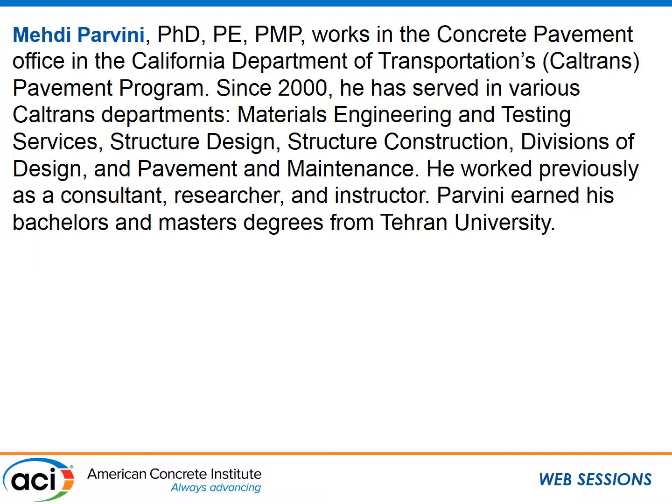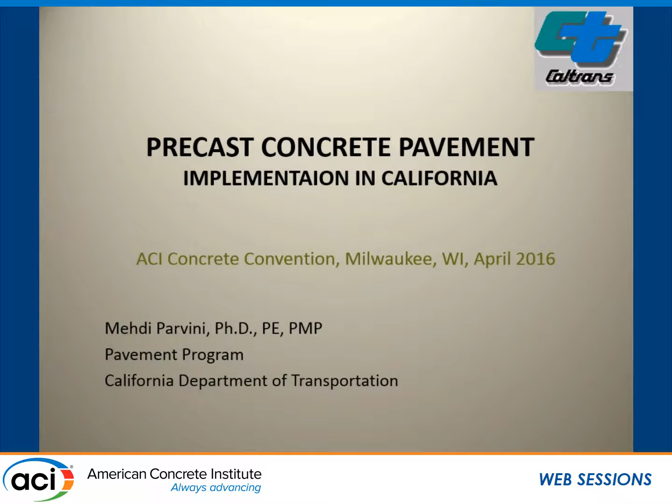Being the second to last presenter on precast concrete pavement, all of my thunder has been stolen. So I have to alter my presentation if I don't want to repeat the same talk about different systems, applications, or benefits, but I'll do my best to make sure you don't fall asleep.

First of all, I have to acknowledge this fact about precast concrete pavement: this is another application of this wonderful material we call concrete. If you're involved with concrete in any way, you should be proud of working with this material, given its flexibility and how it can fit our needs for different cases. I'm going to go quickly through the introduction, talk about implementation in California, and then a sample operation.

So they don't give you a break to do your job. But on the other hand, we don't have a construction season in California, so that's the advantage we have.

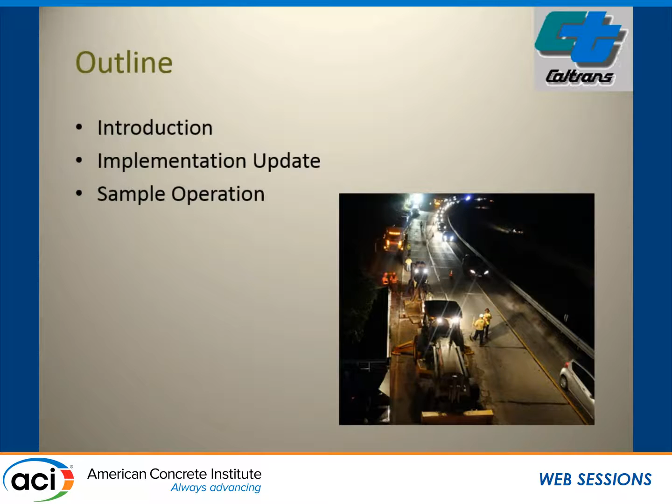Having said that, there are some general benefits for precast systems: being fast, durable, you can do it in a little space, and you can do it in relatively different weather conditions. But when it comes to pavement, it translates to some very major issues for a DOT agency.

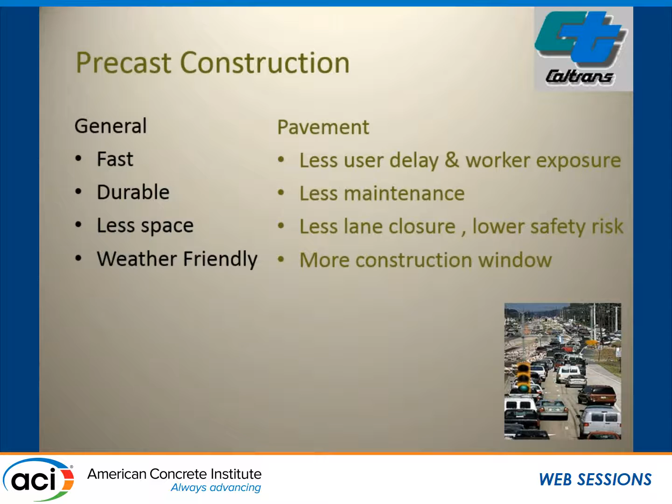Less user delays, less maintenance, and less need for lane closures. Overall, what's important is we're talking about safety. Being in the highway agency business, your work is close to an area that's relatively dangerous—you're working within exposure to live traffic, 60 to 70 miles per hour, with people who get drunk or sleepy at night. So the less you have to do maintenance or work zones, the better off you are in terms of safety. Safety is a key issue for all highway agencies, especially for California because of litigation. That's another reason we have to use precast concrete pavement.

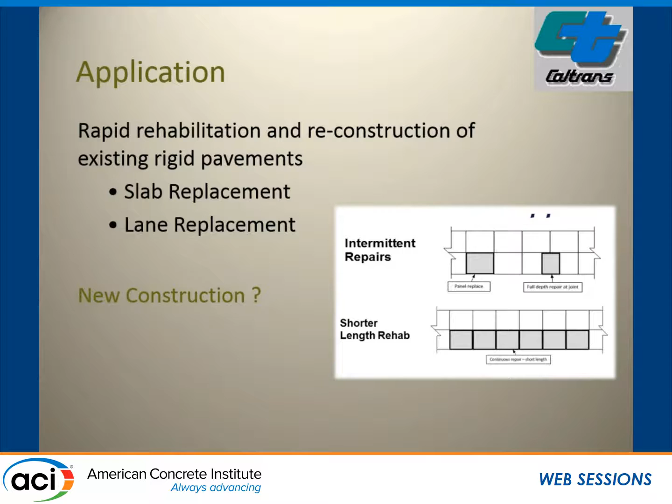You've seen the different applications: intermittent repairs and rehabs, longer lanes—we call it slab replacement and lane replacement in California, both under rehab—and new construction. Shiraz mentioned the 22-mile highway in Indonesia. We haven't used it for new construction yet, but hopefully we will.

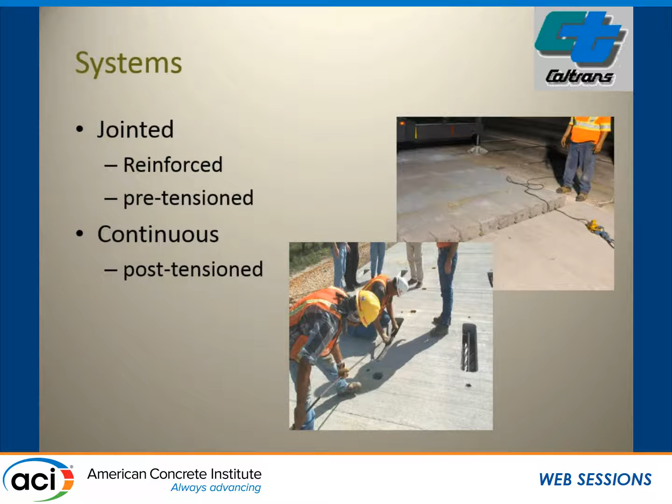Systems, again, you've heard about it—there are two main categories: jointed and continuous. Jointed can be reinforced or pre-tensioned. Continuous uses a post-tension system that ties the panels together. For the jointed system, there are different innovations in terms of connection, grading, and support.

What we do in California is use a generic system which is not patented. We put it out and give contractors the flexibility to choose a patented system if they want, but our system is generic with no patent, so any other state can use it.

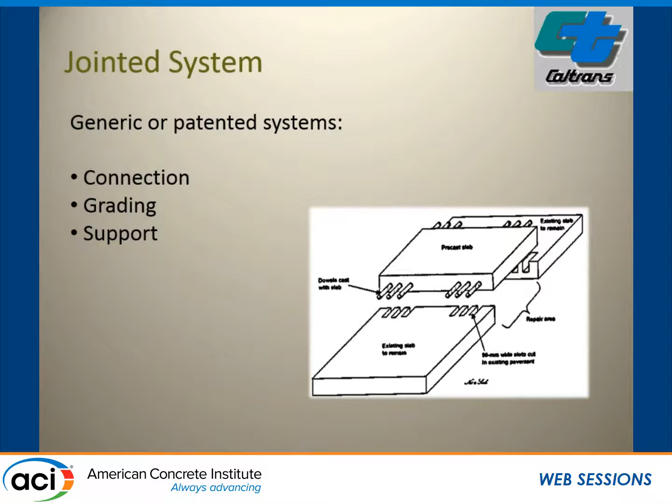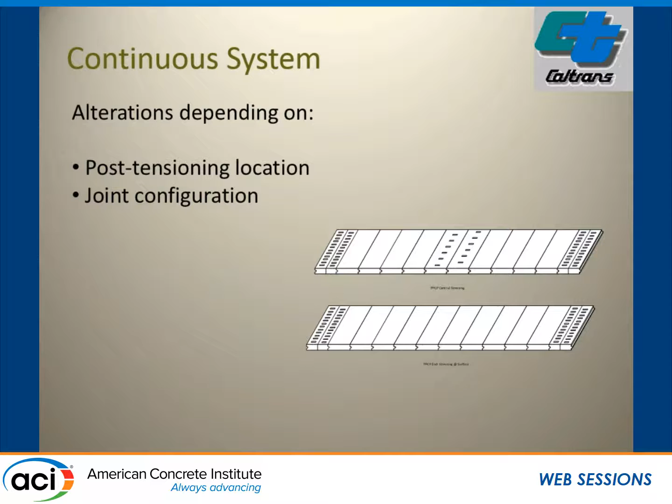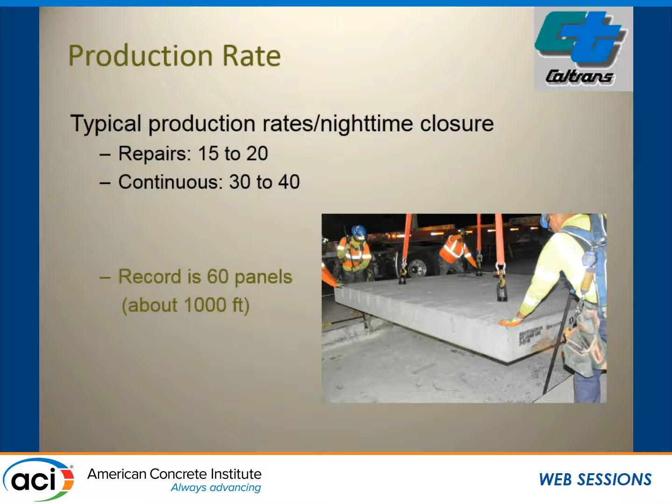We placed about 60 panels of 16-foot long panels in one night. So that was the record. I don't think Guinness Book of Records cares about precast panels for now, so I don't expect we'll be in that book, but that shows that there is room to improve this technology.

This is a partial list of projects that have been built, are under construction, or are in the design phase. The white ones have already been built. The yellow ones are under construction right now - there are about half a dozen of them. The blue ones are in design, and two more projects just came to my desk, so there are more than what you see on the list.

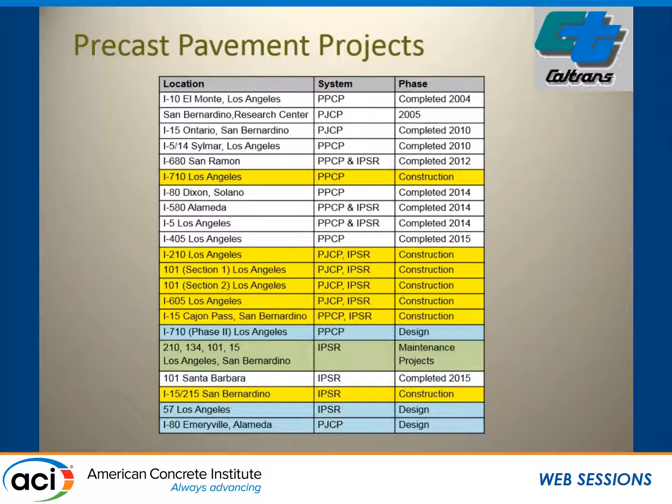The first and oldest one was completed in 2004, and as you can see, we have had continuous exposure to precast concrete pavement. The green line represents more than 25 projects, which I put under one line because these are maintenance projects as opposed to the others, which are more major projects or what we call capital outlay projects. So we have been doing this for a relatively long time, and we plan to continue and expand the use of precast concrete pavement.

During this time, there have been design challenges. For those not in the pavement world, pavement has historically been designed on an empirical basis. You might have heard about the AASHO Road Test and the design methods that came after. More recently, we talk about mechanistic empirical design, and again there is an empirical component in that methodology. What it means is they look at the performance of all these pavements and come up with a design methodology.

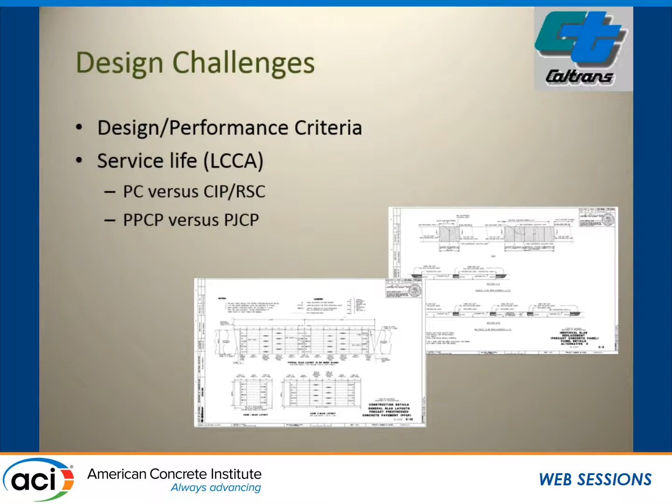Unfortunately, precast concrete pavement being relatively new, there isn't much data and information, so that's a big challenge for design. Some of the failure criteria haven't even been studied properly - we still look at our cast-in-place concrete and think our precast concrete would probably fail the same way, but that isn't necessarily the case. The other issue is service life. There are questions about what the service life is for precast concrete versus cast-in-place or rapid strength concrete, and what the difference is between precast post-tension and precast jointed concrete pavement. These are things we are still working on.

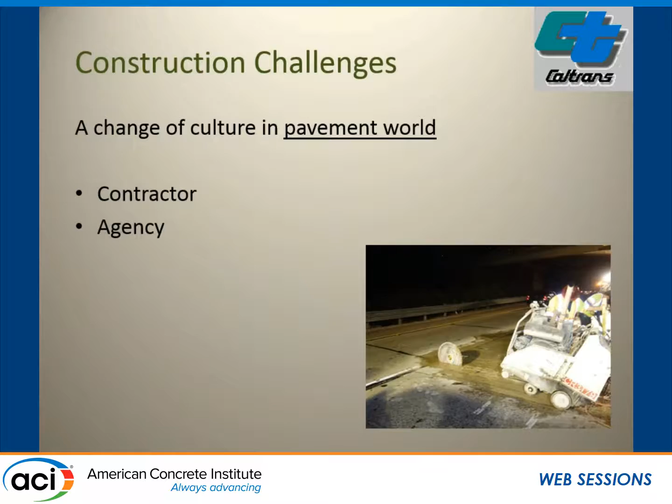In terms of construction, for our contractors it's a change of culture. The things we talk about in precast concrete pavement are not familiar to a cast-in-place contractor, so these are new even for the agency and our inspectors. Wisconsin was stressing a lot about saw cutting, so that's the way we do the saw cut - we send the blade ahead of the saw cut, which helps us do a better cut in advance.

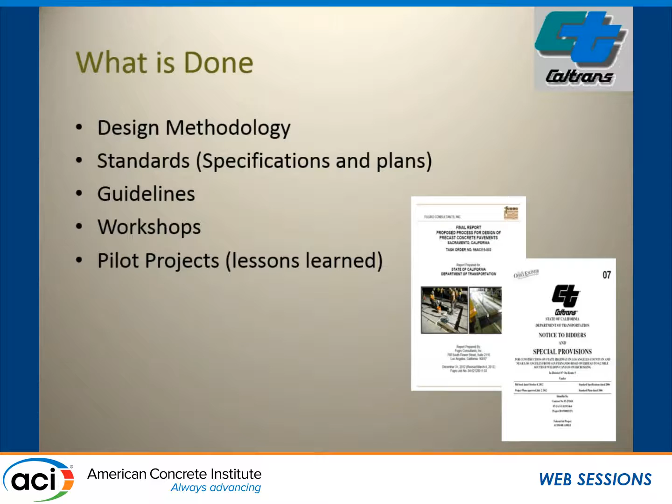What we have done so far: we have come up with a design methodology using the limited information we had. We have prepared specifications and standard plans, guidelines, workshops, and put more than a dozen pilot projects in place. What we need to do now is see what we've done and hopefully use those lessons to advance the technology.

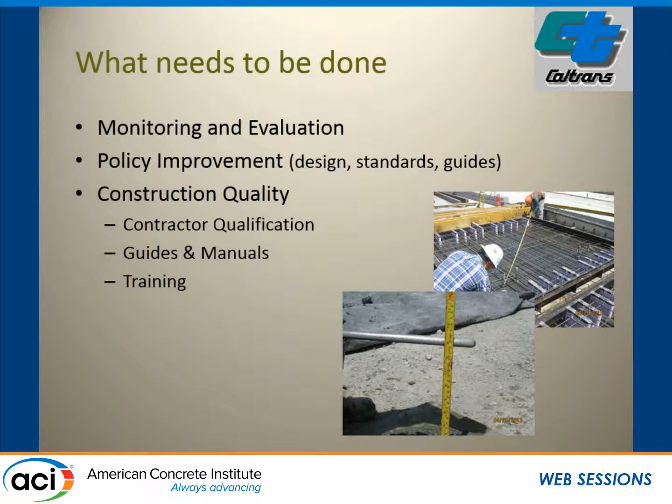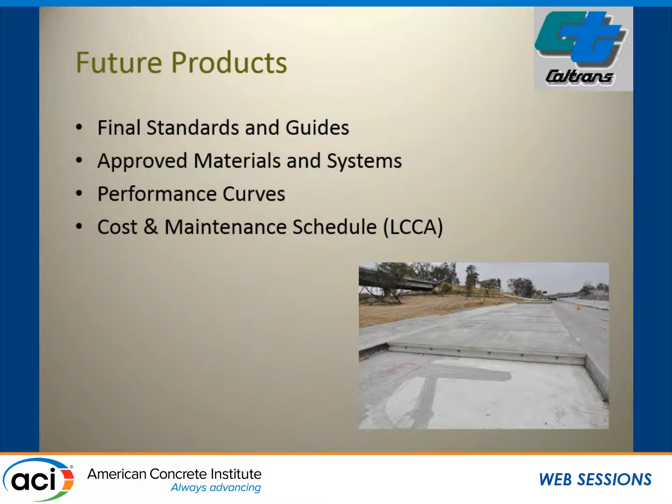Policy improvement always has room to improve specifications and guidelines, and we are emphasizing a lot on construction quality. Being something relatively new, we need to do a lot of training - just-in-time training and pre-construction training - to make sure everybody knows what needs to be done. Future progress would include better standards, more guidance, and a better understanding of cost and maintenance schedules. Fortunately for California, the cost has been decreasing as we do more precast concrete pavements, so that's not a big concern for us.

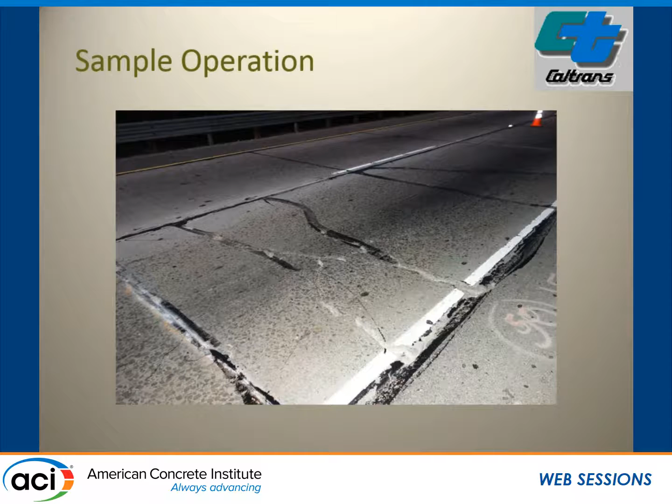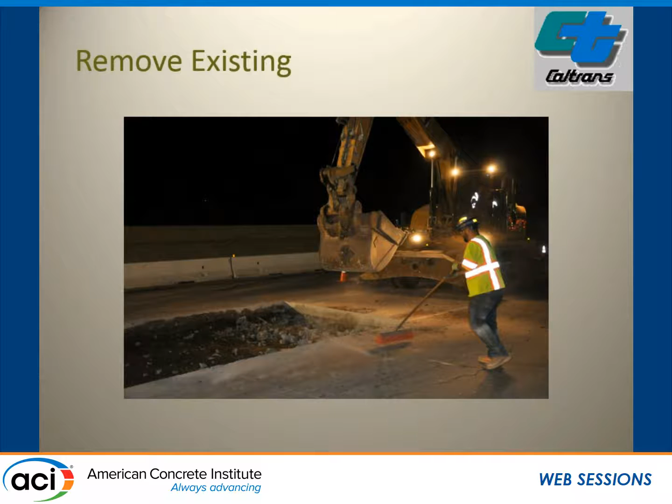What we do is come in, cut and remove the existing pavement, and compact the subgrade. I didn't see that in some of the previous presentations, but we still need to put things on compacted soil. In California we replace the base and put a brand new base under our precast concrete pavement, but if the soil isn't competent, it doesn't matter whether you put a base or precast or anything else. If you disturb the soil a lot, you have to go back and compact it. You can't put a base on disturbed soil—that's the first lesson you get in foundation design 101. So sometimes you need bigger equipment, sometimes a smaller one will suffice.

Putting the base—again in California we always use a lean concrete base under our precast concrete pavements, and as a matter of fact we do it even for our cast-in-place concrete. In this case we use what we call LCBRS, which is a rapid set. It sets in about 40 to 45 minutes.

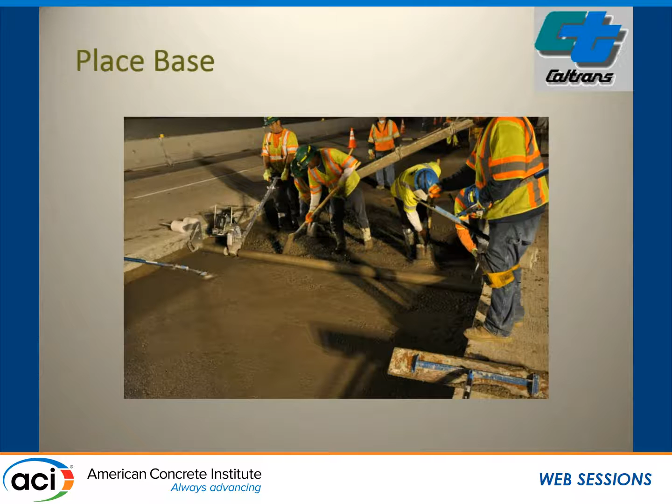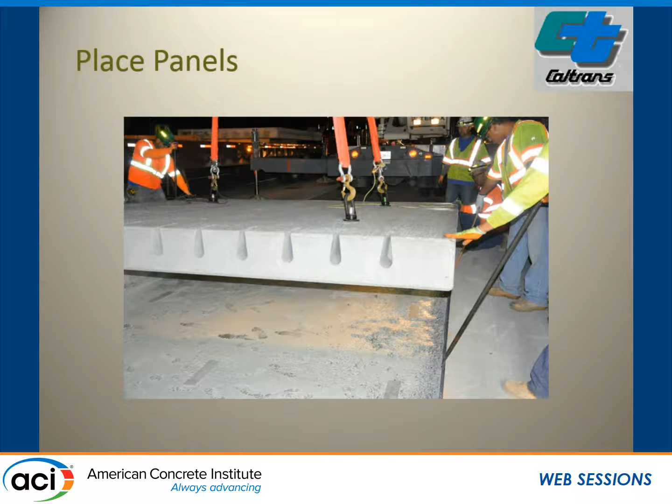There are different ways that they roll it, then they bring the panels. This is, again, what Shiraz was showing—this was developed in California. They call it teardrop or cast slide. It's a generic system where we put the dowels in one panel and slide it into the other. We believe it's fast and very high performing.

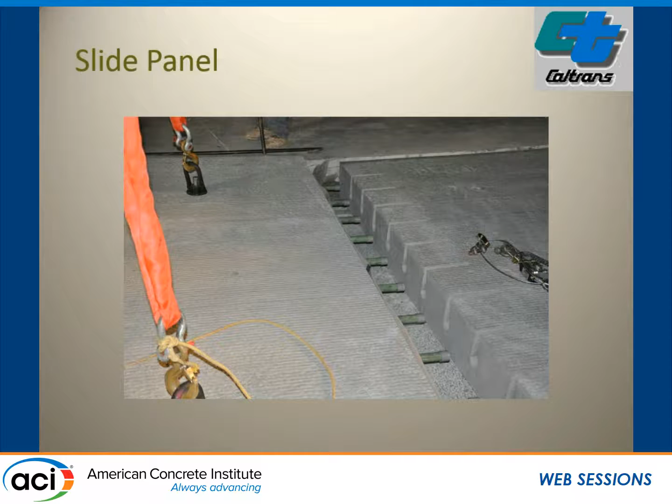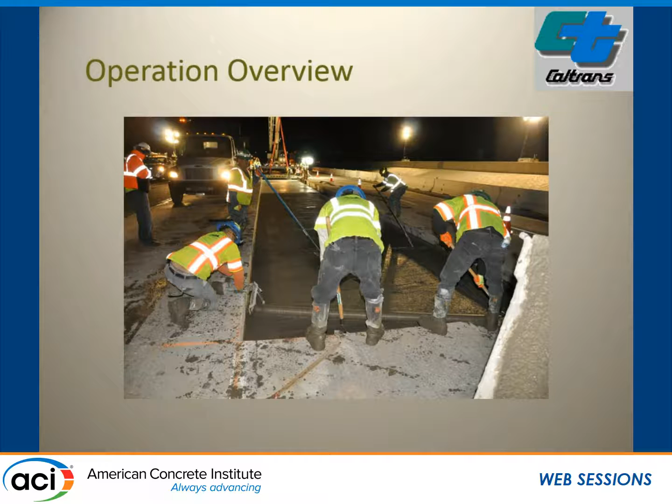This is a project that started two weeks ago—this is the test strip. There are 7,000 panels, about 37,000 cubic yards of precast concrete pavement. This is a general overview of the operation: they're putting the lean concrete base at this end while the panels are fast approaching, so you can see how quickly that can be done.

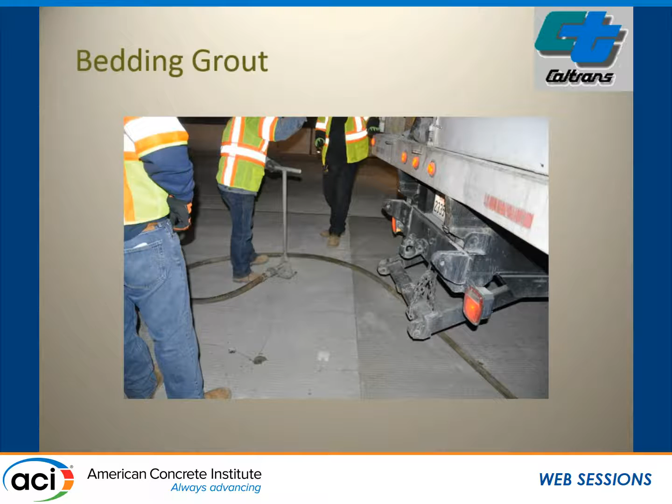Bedding grout was discussed before—it could be gravity fed or pressurized depending on the application, and then we fill the dowel slots. So basically that's the operation, and this is the finished product the next morning.

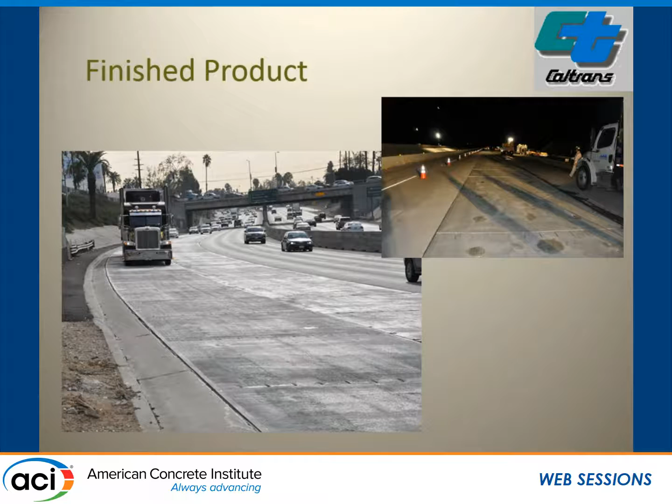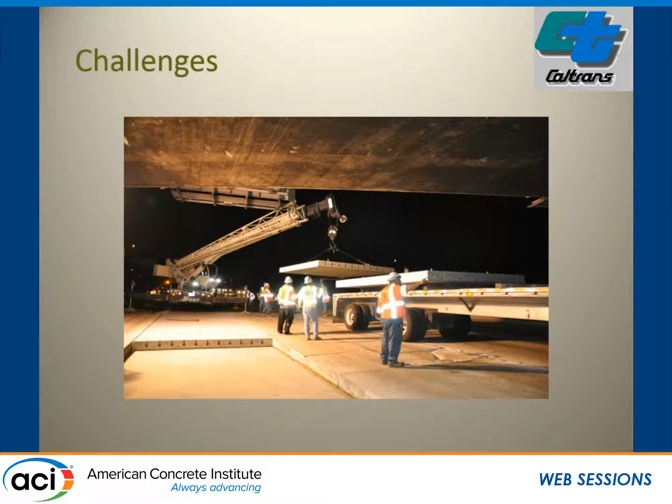It's not always straightforward; sometimes there are challenges. One challenge we have in the LA area has to do with all those overpasses—it's hard to put these 16-foot long panels in with cranes under these overpasses. So it might impede production, but overall, 500 to 800 feet per night in one closure is the norm in California. With that, I'll take any questions.

I wonder if you've seen the same increase in cost that one of the previous speakers mentioned. Have you seen the cost going up, or has it leveled out for you? It looks like you've done a lot of panels.

It has come down significantly in California. Honestly, I was surprised by what I saw from Wisconsin, that the cost has gone up. Maybe one reason is we're very clear to our contractors that precast concrete pavement isn't going anywhere—we're going to do more and more of it. So maybe they're investing both money-wise and training-wise on that, and that's maybe the reason the cost is coming down. Did I answer your question?

How many contractors do you think are available in California? Five, ten, three? Are you talking about precasters or primes?

Precast? Well, we have more than a dozen precast plants in California. But one thing to remember is our contract for any of these precast jobs is with the prime, the general contractor, and precasters work under the capacity of a subcontractor to the prime. So we don't have any shortage of precasters in California. What we need is more knowledgeable prime contractors who know how to install these materials. Unfortunately, with the problems we've had in the past, most of them, if not all, were about installation, not really the precast coming out of the plant. We've had very few issues with the precast panels per se.